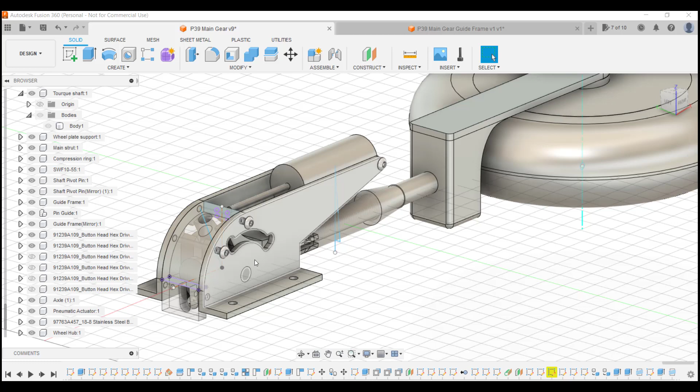So I have here the Fusion 360 model for the main gear of the P39. And what I'm going to talk about making today are these guide frames that are for the actuators that actually actuate the main gear. We are using metric measurements for this project, but because we're in the United States, much of the materials that we have available to us are in imperial measurements.

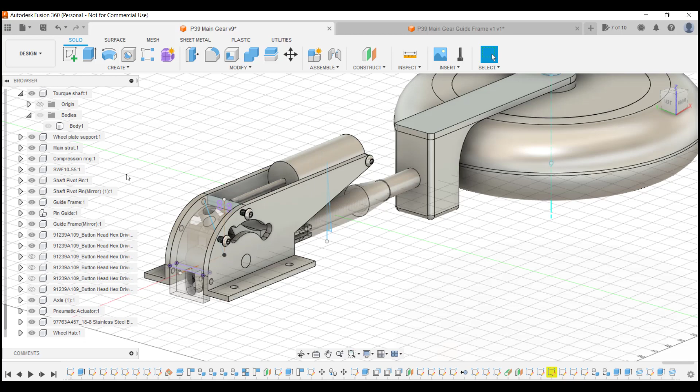And although this design wasn't really made based upon any particular materials that we have, we are going to end up using the materials that we have, and we've got to adapt the materials to the design now that it's time to manufacture it. The part that I'm going to be making here today, I call the guide frame, and I have it highlighted here. Its thickness in the design, as you can see, is 3 millimeters.

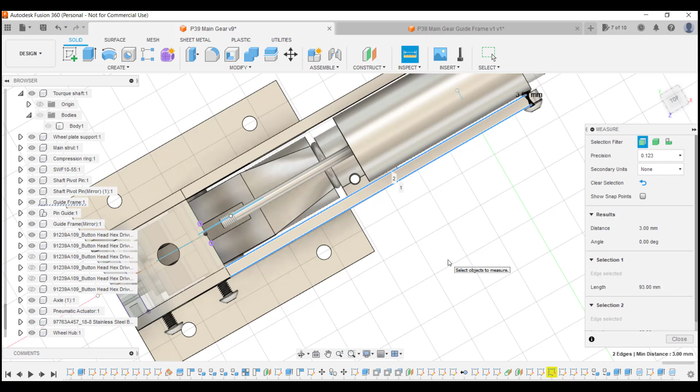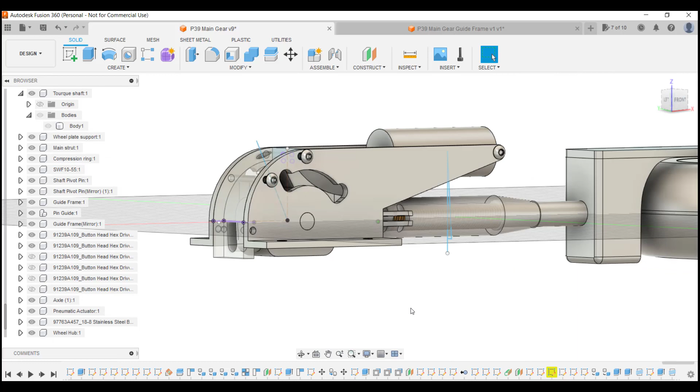And if we look at it from the front here, we'll clear our selection and then set the base of our measurements here, and the maximum measurement is almost 41 millimeters. What we have available to us to make this is a piece of 1.5 by 1.5 by 1/8 inch aluminum angle, which is made of 6061.

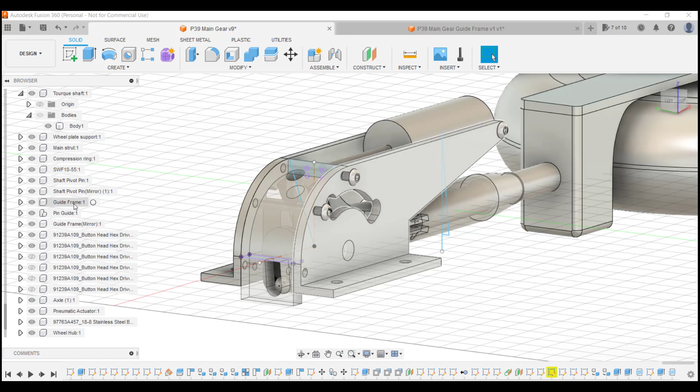The way that I do this is I go to the component within my design. So I'll pick this particular component right here. And the best way in Fusion to pick something where you make sure you have the whole component is to choose its component name over here in the list. And that way you get all of it. And typically what I do at this point is I simply right click on this and hit copy.

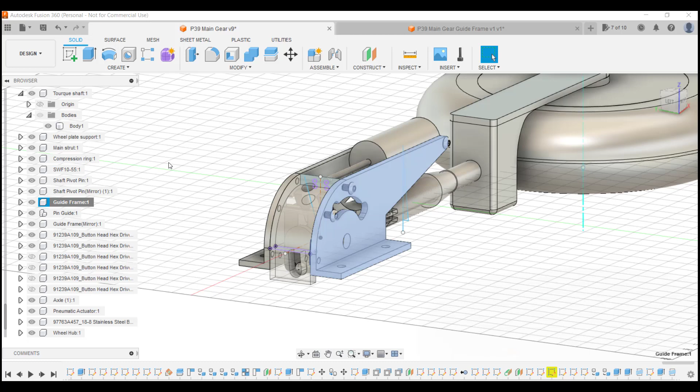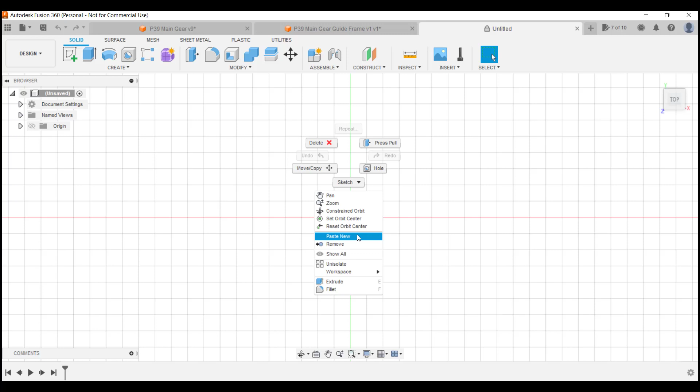Now, once I've hit copy, I can go ahead and hit the little plus up here, and that will start me a new design. And at that point, all I have to do is right click in the middle of the design and come down to the words paste new. And that allows me to get an entirely new copy of this particular part placed within this design, which is yet untitled. It's probably easier right now to adjust it a little bit to get it in the right orientation for the machine.

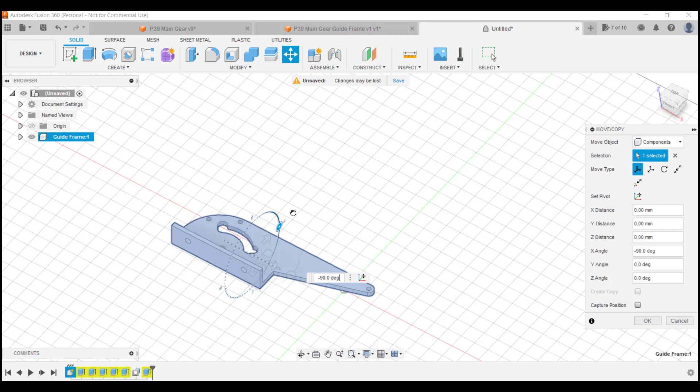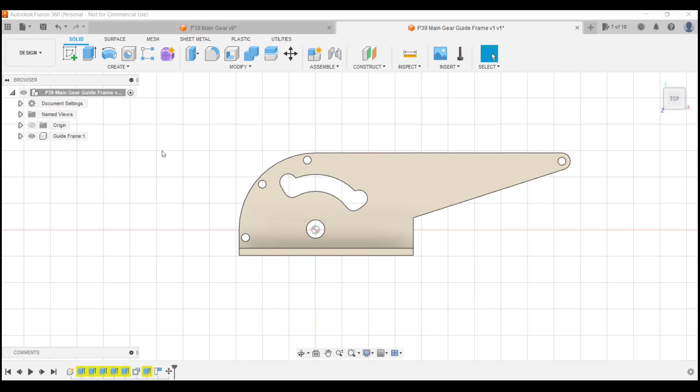So then we have to go ahead and rename it, which I've done up here. I just said save, and I renamed it as the P39 main gear guide frame. Now I've got to remember that since I'm going to use this drawing as the basis for generating the G-code that will actually cut the part out on the milling machine, I have to make sure that the orientation of the part is the same orientation as it will be on the milling machine.

Now, if you imagine that you're looking down on the milling machine table, the red axis here, the x-axis, is the horizontal axis. This green axis is the axis perpendicular to it. And then there's a vertical axis that goes up and down with the milling head, and that's called the z-axis. Now, what I have to do is make sure that this part is in the same position that I would have it in the milling machine.

And quite frankly, I need to be able to deal with the fact that I'm going to be making this thing out of a piece of aluminum angle, which is 1.5 by 1.5 by about 3.5 millimeters. Now, if I leave the part just sitting on the milling machine as you see it, the problem that I'm going to have is that this piece of the angle is actually sticking up, and it is going to very easily interfere with the movement of the tool and the holder above it.

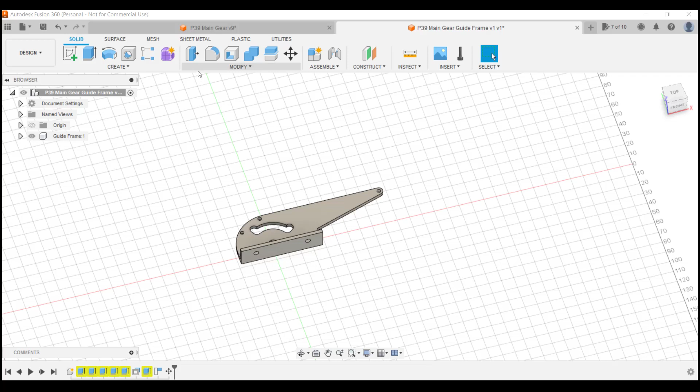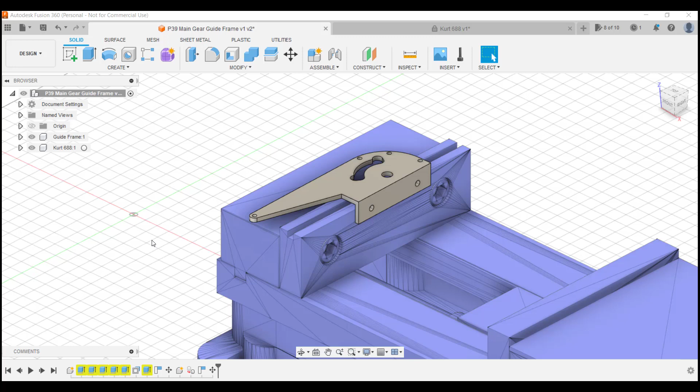So really what I need to do is figure out a way to secure this part in the machine in a way that doesn't have this thing sticking up. And the best way to do that is to use it to hold the thing down. So here's the way I'm going to make it. I have placed this part now on a model of my milling vise, which I got from the company that makes it, which is a company called Kurt that makes nice vises.

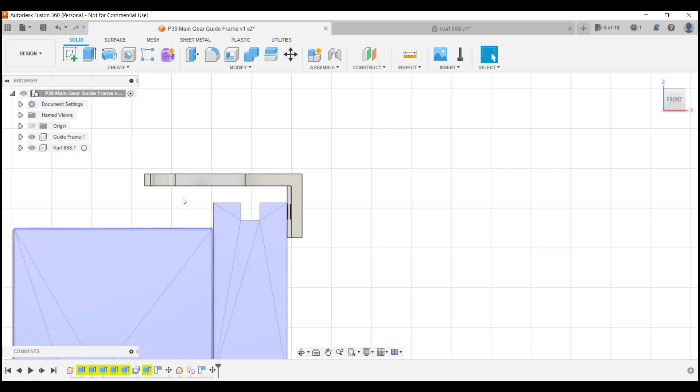And as you can see, I have placed this so the part of the body that I'm going to machine is above the top of the vise, and I'm going to actually place a piece of scrap aluminum in this space right in here so that when the tool penetrates it, it won't hit the vise, it'll simply hit this piece of scrap aluminum. And then I'll bring the other jaw of the vise forward and tighten down on the material.

And the nice thing about that is that it makes it very easy and simple for me to take this in and out of my vise, because I can put a stop in here and stop it on some easy to find location on this particular part, and it will just make the machining of it considerably easier. Now do notice that I am going to end up machining the back side of it, so when I pick the contours that I'm going to want to machine, we have to remember that the part is actually upside down now from the way that we had it set on here before.

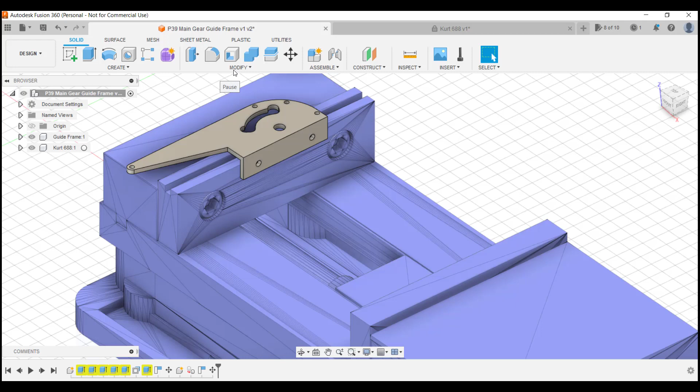So here we are, and I have set the stock. I created the stock under the setup command here to allow the stock to more or less duplicate the top of this piece of aluminum. And we know we're using an aluminum angle, and we know that this piece of stock actually makes this turn and comes down in the vise.

But since the tool is never going to touch it and the vise jaws are going to be closed, it's kind of out of sight, out of mind, and it really doesn't matter that it is not shown in this view. Note here as well that I picked a control point on the stock that's on the material that we're going to cut, and I chose the corner right here because it's easy for me to get to, and that'll line up all the coordinates so that we'll be able to reach all of the places on the top here.

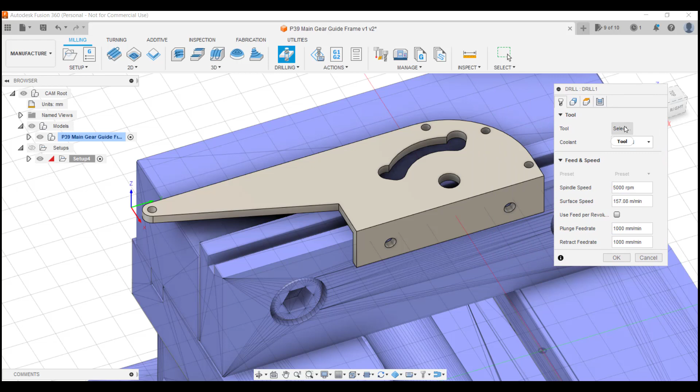So the next step is to determine what milling procedures we're going to use in order to cut out these various different features. The first one we'll notice is that we have several drill holes, so we know that we can use a drilling procedure for that. And then there's this strange looking cam slot and this round pinhole right here. The first one we're going to pick is the drilling, and so we'll pick a drilling process and choose a tool, which in this case is going to be a 3mm tool, which I should have right here.

And we'll use flood cooling, and I need to select the hole faces, which Fusion allows me to just tell it that I just want all the same diameter, and then it will choose those for me. I say okay, and then it creates me a drilling procedure that will then generate G-code for the drilling of the holes. The rest of these processes work very much the same way.

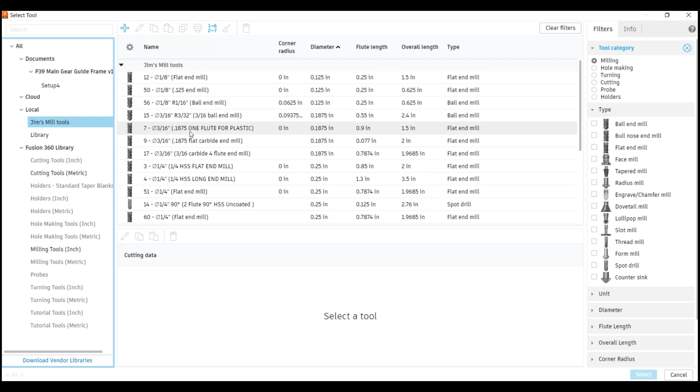The next process is going to be an inside contour. We're going to do this cam slot and the pinhole, and to do that I'm going to pick a 2D contour. The tool I'm going to choose here is a 3/16 inch flat end mill, and let me get to the right spot. This one right here, tool number 9, which is a 3/16 inch flat carbide end mill.

And I have chosen a 3/16 inch end mill for this because it's a balance of internal strength, which allows me to go fairly fast, and it's still small so that I can get into all these various nooks and crannies. This is only a 1/4 inch hole. Well, it's a little bit bigger than it. Remember, these holes are metric and I'm using imperial size tools, so we have to bear in mind the differences.

But nevertheless, the first thing that it expects me to do after I've chosen the tool, I make sure I've chosen flood cooling. Look at these parameters to make sure they're right, and they do look to be right. And then I'll go ahead and choose the geometry. And the geometry is to this bottom contour here. I want the milling tool to enter the top of the face here and cut down to the bottom, and the same thing with this hole.

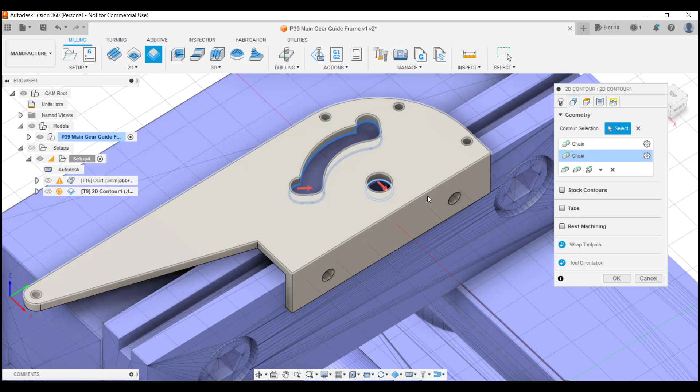So that's what we want done with this procedure, and I'm going to then make sure that I have the height specified correctly, and I want to go from the stock top to the stock bottom. I want to make sure that we get that cut, and then we may in fact offset about 10 thousandths below the bottom of the flat thing, and so that's about 2/10 of a millimeter down below the bottom. In fact, let's go 1/2 millimeter below the bottom. This flopping back and forth in units is dangerous, and you have to be careful with it.

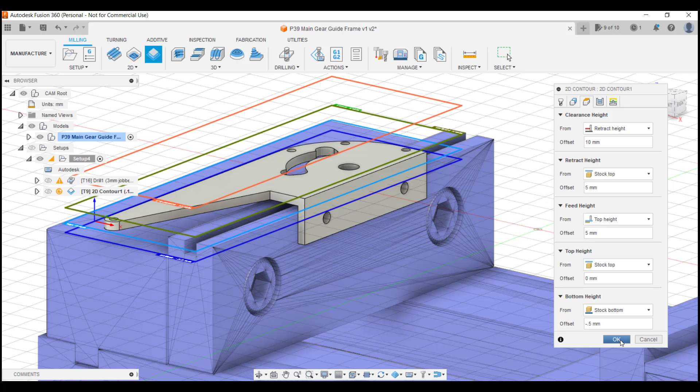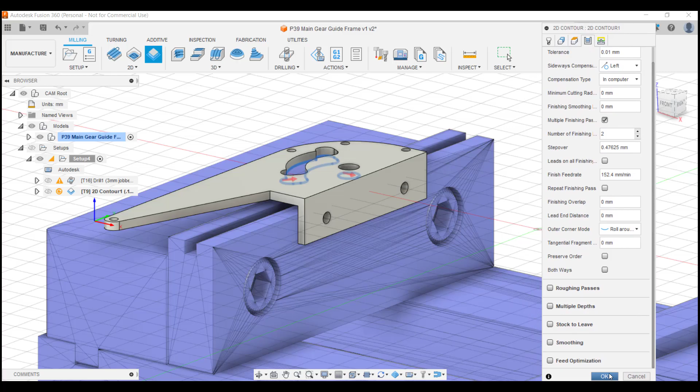So that is okay. I want to check my passes, and I'm going to use multiple finishing passes here. The reason being that I like to get a second pass. We're going to do this cutting in one pass with this 3/16 inch end mill, but I'm going to follow that with kind of a spring finishing pass, and that should be sufficient to do this. I'll check the rest of the parameters and say okay.

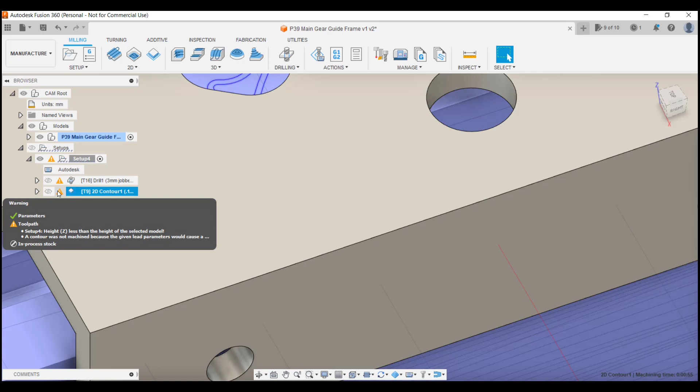So we can see that we did these, but we have a problem here because we didn't do these. I'm going to have a look and see why. A contour was not machined because the given lead-in parameters would cause a crash. And so I'll have to go back here and fix that, and I'll do that off camera.

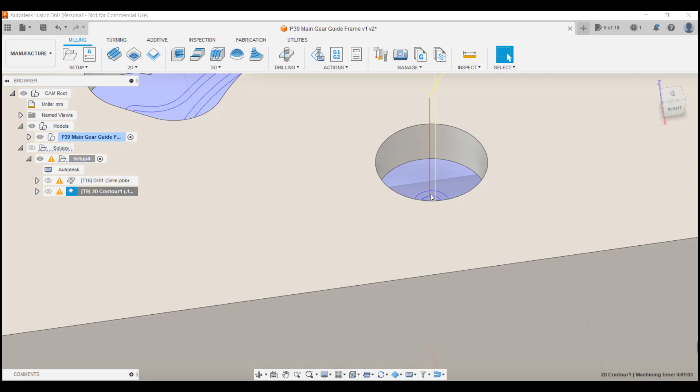Okay, I fixed that little problem off camera. What I did was simply eliminated the lead-in for this hole, and you can see that there's the cut paths right there. Well, let me check the warnings again, and the warnings are just the height of the model, which we know that the height of the model and the height of the stock are not exactly the same. But in this case, we don't really care because the milling machine doesn't care. It will cut it regardless because the difference is only very small.

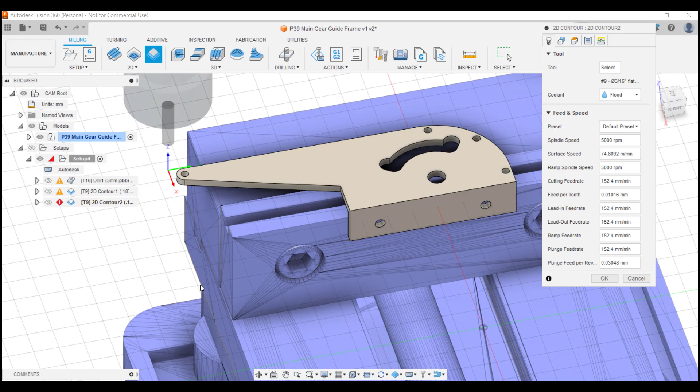So now we're going to go and pick up the last contour, which is the outsides here. Remember, the stock is actually a piece of angle that is sitting in here. So we are going to have to cut the exterior, but remember that we don't want to cut this part over here because that's in the jaws of the milling vise. So as we pick these contour lines that we're going to cut, we're going to have to watch out for that.

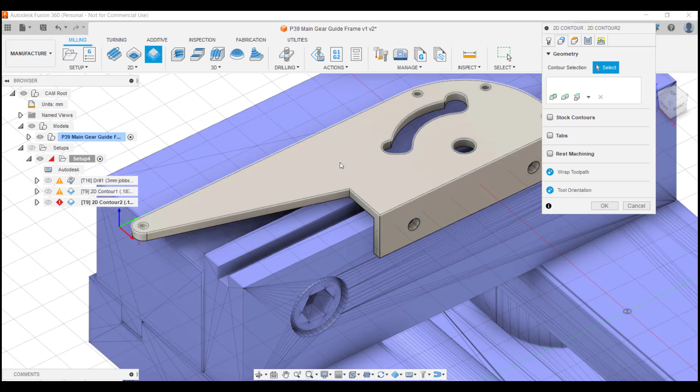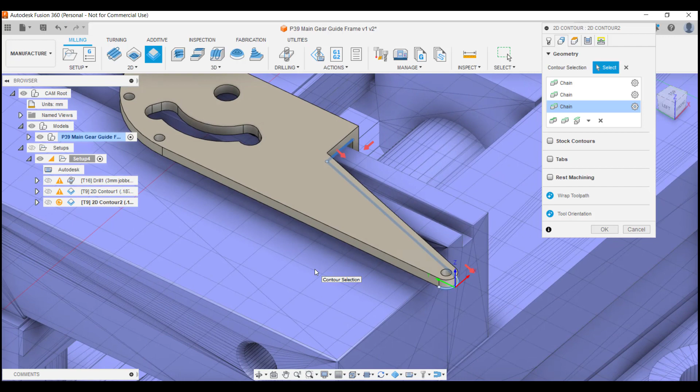We do that by selecting the contours using the Alt key, which allows you to select only a segment of the contour rather than the whole contour. And then you can pick and choose which of the segments that you want to use while you're doing it.

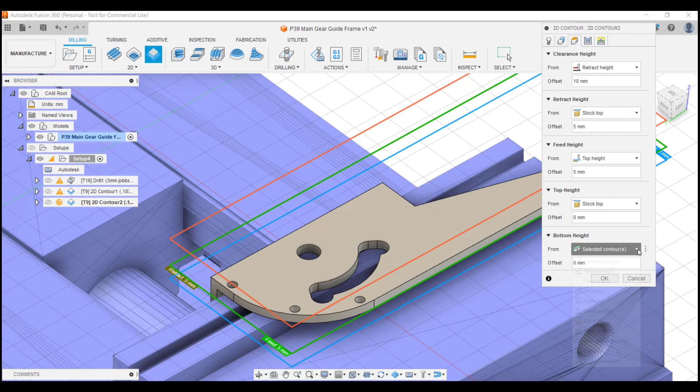So that leaves us a little bit of a problem right down in here because there is no contour on either side. So we need to figure out how we're going to get that cut. And the way that we're going to do that is with the lead in, lead out. So first off, I've selected the geometry. I'm going to do the same thing and tell it to cut from the top of the stock to the bottom of the stock.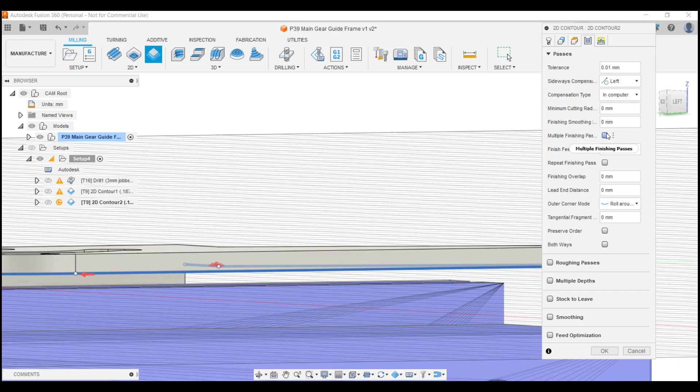And Fusion shows you where the bottom of the tool will come, and that's this blue line right here. And I'm going to check and make sure that it's not actually in conflict with the vise anywhere, which it's not. We're going to do it the same way with a cutting pass and a finishing pass, and then we'll use a lead in for each one of them, and I'm going to make the lead in a lead in sweep angle of 0. So it'll lead straight in. And I'm going to make the horizontal lead in be a full centimeter.

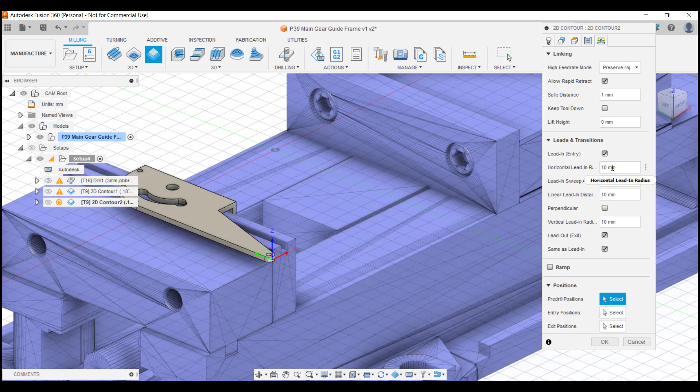That's the wrong one. This is where that goes. I put it in the wrong box. This is actually the horizontal lead in radius. We can check that now, and it should give us what we want. If it doesn't, we'll go back and change it.

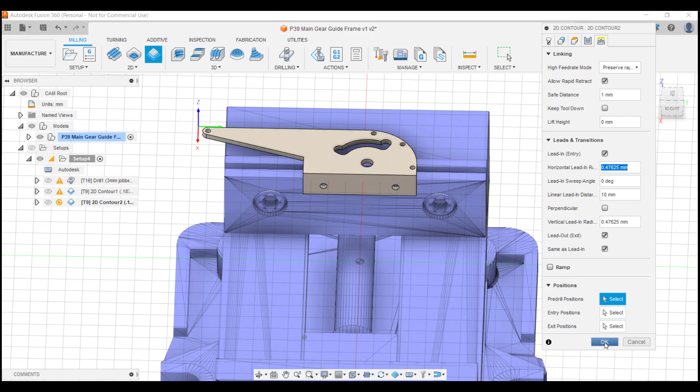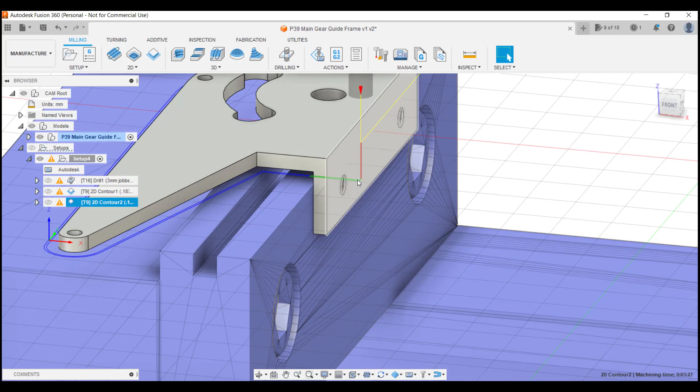So there's the lead in. You can see the machine right here, and the machine shows us what it's going to do: it's going to drop down to here. This is its penetration. It's not penetrating in this case, but it's actually going to start the cutout here. That's the lead in, which is fine because that's where the piece of aluminum angle is, but it's all above the vise, so it doesn't actually hit the vise, but it does cut cleanly through here. Then when we take this piece of material out of the milling vise, we can just cut that extra material off.

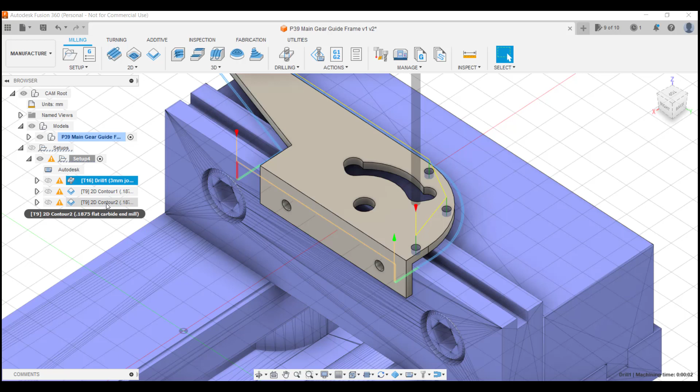Now, the final thing that we have to do is actually go ahead and create the G code. And this particular version of Fusion only allows you to create G code for one of these milling setups at a time, which is fine, actually. It's actually not an advantage to try and automate these processes when you're doing prototypes like I'm doing here. So it's really no inconvenience at all.

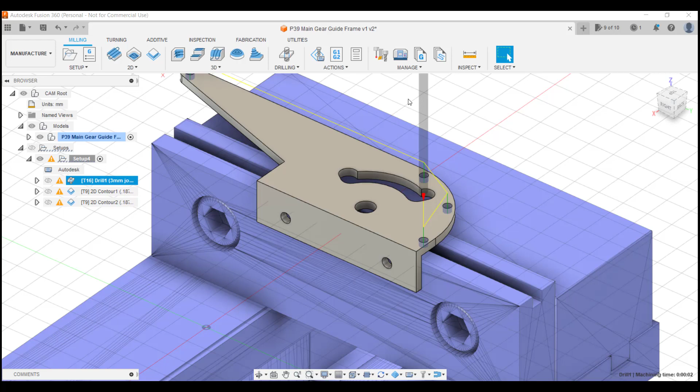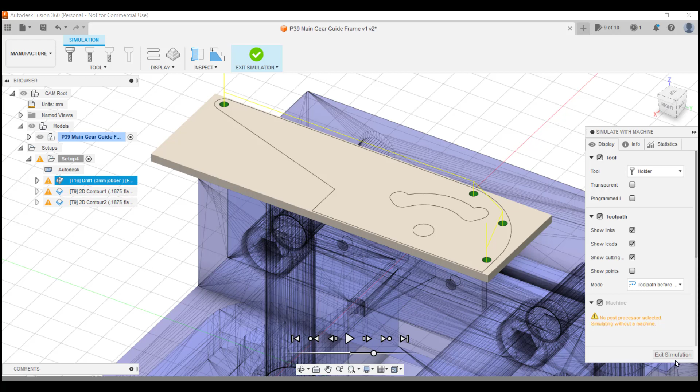So I'm going to come up here to Actions. Well, really, I should simulate first. I believe I can go ahead and simulate this first thing and we'll see what it looks like, just to make sure that there's no inconvenient little gotchas that we haven't thought of. And the second one. Here's the second one, which will be the inside contours. Okay, that looks good. And the third one. We'll simulate that. And this should show what I was just talking about, hopefully.

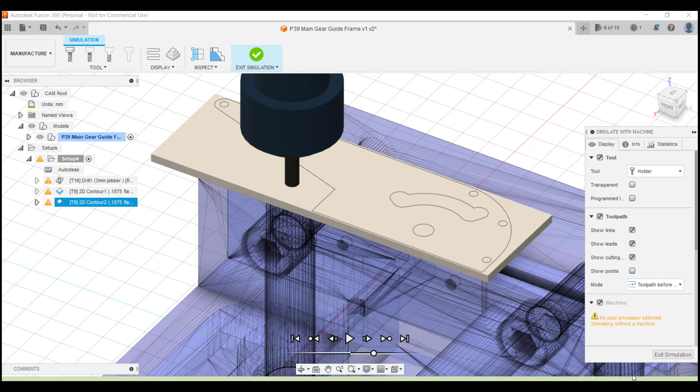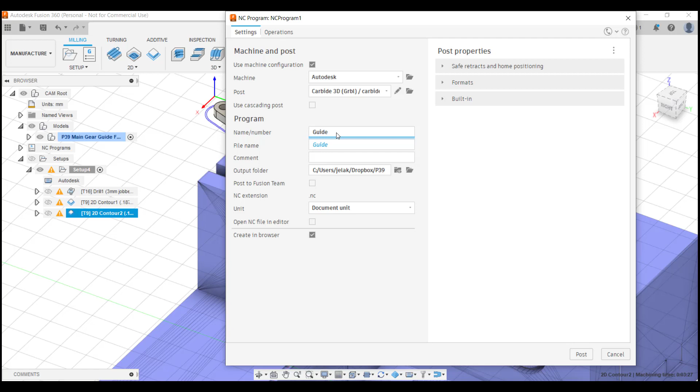It doesn't cut off that top because we decided we didn't need to. But it does all the rest of it, which is what we want. So we can exit the simulation and now go to doing the post-process. So this is called guide plate. I have to make sure I have the right machine here. So the post processor is the Carbide 3D (Grbl) post processor. And that's correct. It tells me where it's going to put the file when I'm done with it. And I can tell it to go ahead and post.

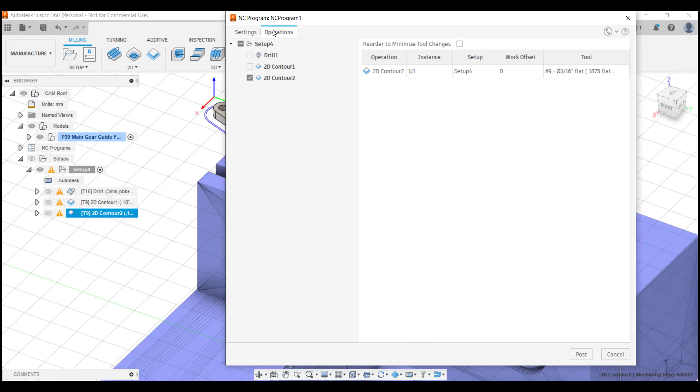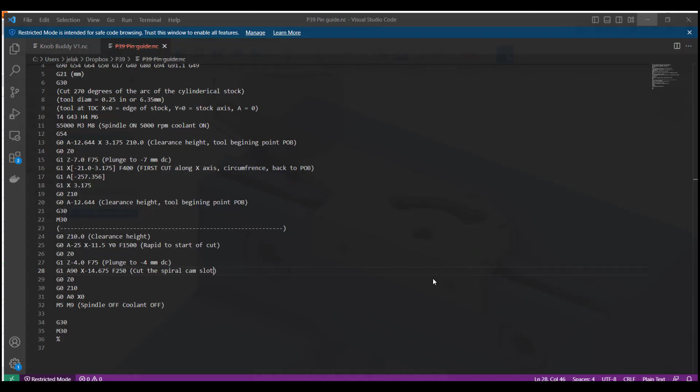And this operation, so that you understand what I'm doing, creates the actual G code that will then go to the milling machine. That's the code that actually runs the machine. So it tells me the code was successfully posted. And if I want to view the code, there it is. It pops up here in Code, which is Microsoft Visual Studio Code, which I use to look at G code.

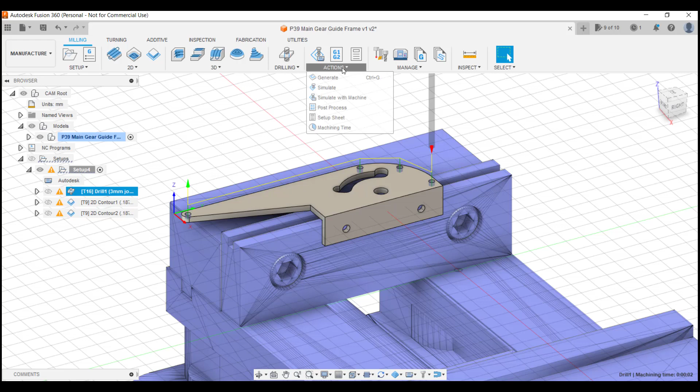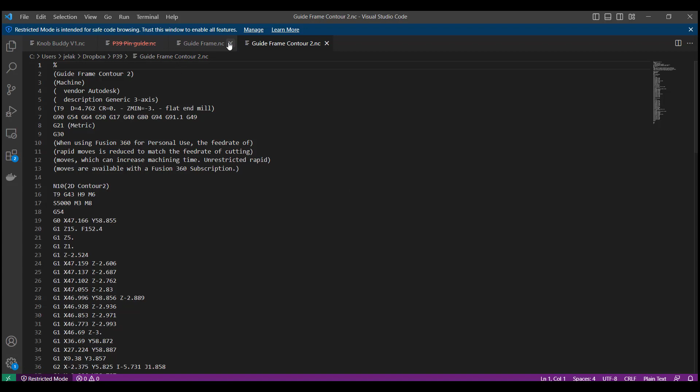I will go ahead now and create the code for all three of these milling procedures. This is the drill here. So I can get rid of that one. This is the one now for the exterior. I'll talk more about the code when we actually cut these things out tomorrow. Okay, that's the finished part. We can remove this from the milling vise and clean it up and deburr it, and it should be ready to go.

All right, I'm going to wrap up this recording right here, and we'll continue this project with the milling of the actual part.